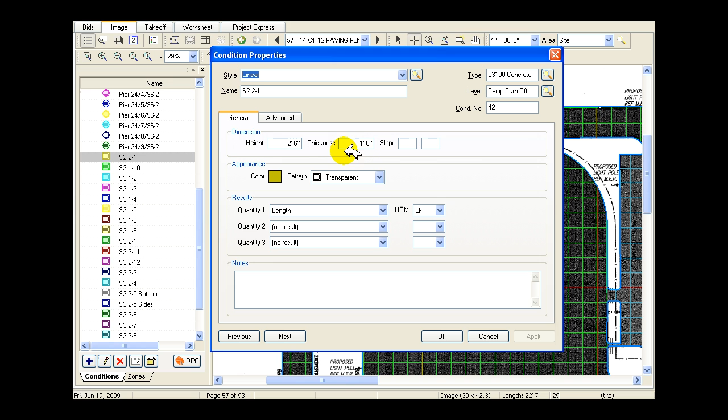For the footings, I do the same exact thing. I reference each detail. I color them different, even if they're the same, it just takes a moment. Like I'll start with S2.2-1. I'll give it the height that it shows and the thickness. Now you can do the length. I can do the volume, cubic yards, and I can also give the surface area of both sides in case I want to figure the forming material at the same time.

I'll do the same thing for the light pole bases. I'll set up all the volume, cubic yards. I can do the same thing for any of the quantities because I like to have a complete cubic yard for everything, but I can also break it down into different areas or zones and separate all those quantities. I'll also do anything that's pertinent to the concrete subcontractor, such as the bollards, if they're going to do those, or whatever the case may be.

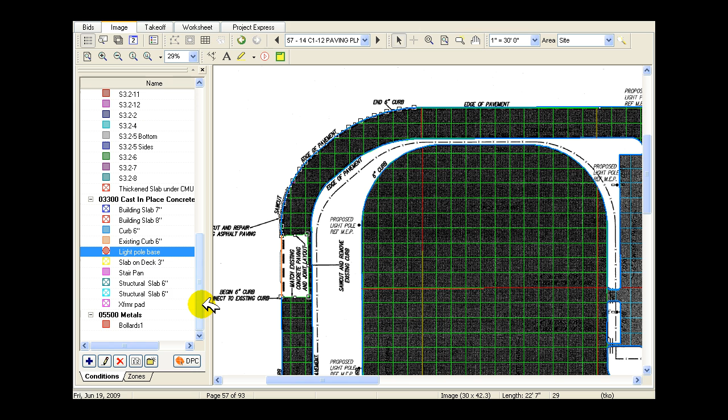And then you can see here where the red indicates the expansion joints. Those I have to do manually, but I can actually set those to a depth, so even if I have to figure the exact quantity of sealant that I'm going to need, if that's what is required on this, I can actually set a depth on that, say 1 inch, and then I can actually do a volume if I want to on that, cubic feet, whatever the case may be.

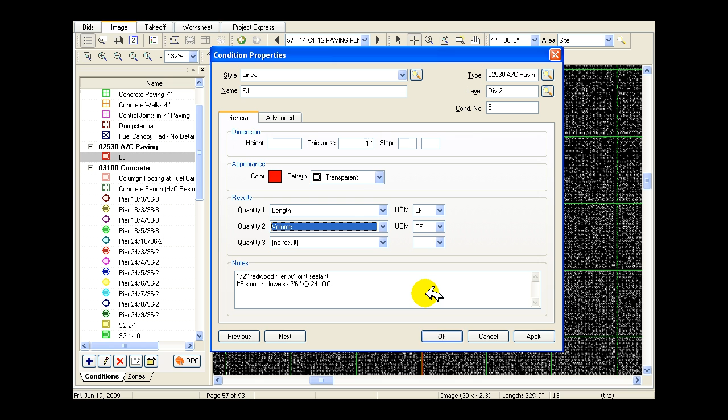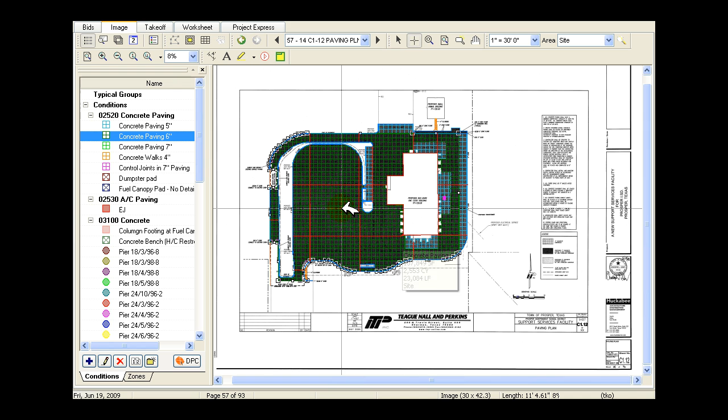And a lot of this is once you do the first one, say you do concrete paving at 5 inch, you can just duplicate this, open up the duplicate condition, change it to a different depth, and now you'll get the same thing. Now if there was an addendum that came out, I could actually take this whole paving detail, click on the new condition, and reassign the objects. So now this is set to 6 inch and not 5 inch, and it just takes a matter of minutes.

For example, here's my bollard count, here's all my foundations, and you can see here where I do the piers, I do all the foundations, and they're all respective to whatever the detail calls out. I just find it much easier to do it that way, even if the foundations are the same size.

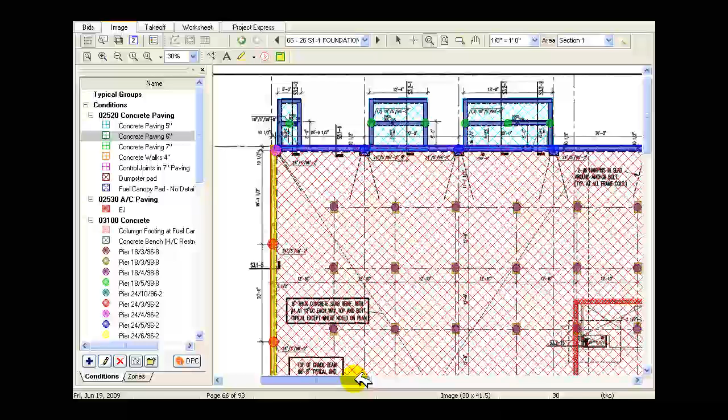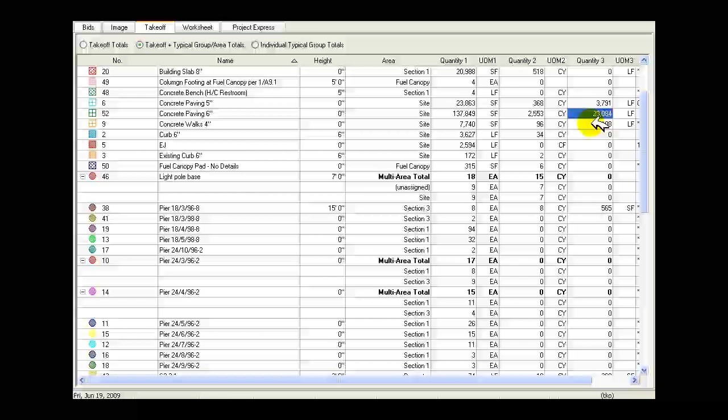Now with the reinforcement, say on this here where it says 8 inch thick concrete slab reinforcement with number 4 is at 12 inches on center, I can actually change this to reflect my rebar and give it the grid length visible, and it's going to give me that. So now if I go to building slab on the takeoff tab, it's going to give me the lineal footage of everything that I need. And then you can add your appropriate waste and other calculations that you might need.

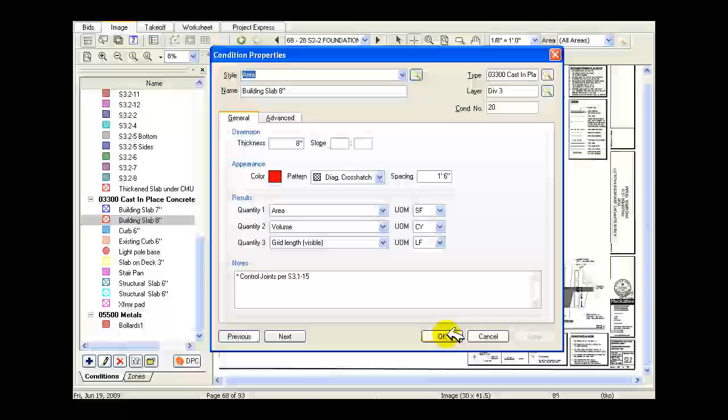The way the program's set up, you can add just about anything depending on how you want to do it. I try to make one condition do as much work as possible. And if you use QuickBid, you can even take those further. If I do building slab 8, which I'm pulling the area, the volume, and the rebar, I can actually take that further in QuickBid and base it on those quantities. And that's about it.